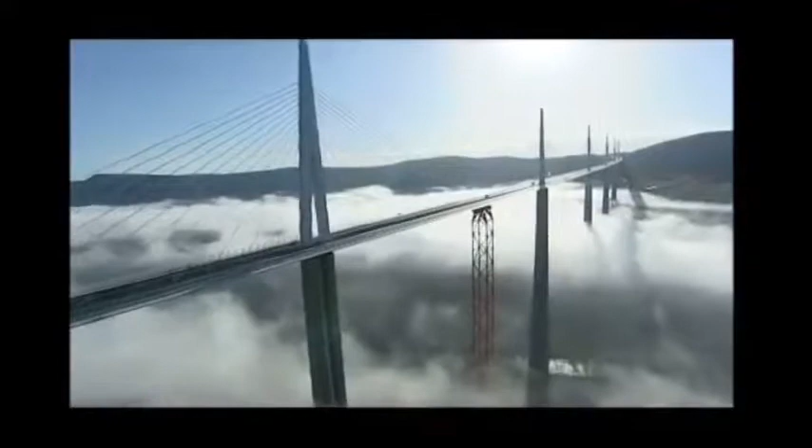Consider for a moment the Millau Viaduct, a structure 2,460 meters long, soaring 268 meters above the valley of the River Tarn. These are just figures, but stop to think how much calculation goes into such a feat of engineering. In fact, it took the Greisch engineering office 80,000 hours, 2,000 drawings, 15 engineers and 20 draftsmen to design the Millau Viaduct. And as incredible as it now may seem, the Millau Viaduct has not always been there.

Not long ago, the road between the Causse Rouge and the Causse du Larzac was constantly clogged with mile after mile of traffic jams. Of course, now and again, tentative ideas would arise, but was it really possible to put a multiple cable-stayed viaduct across the valley?

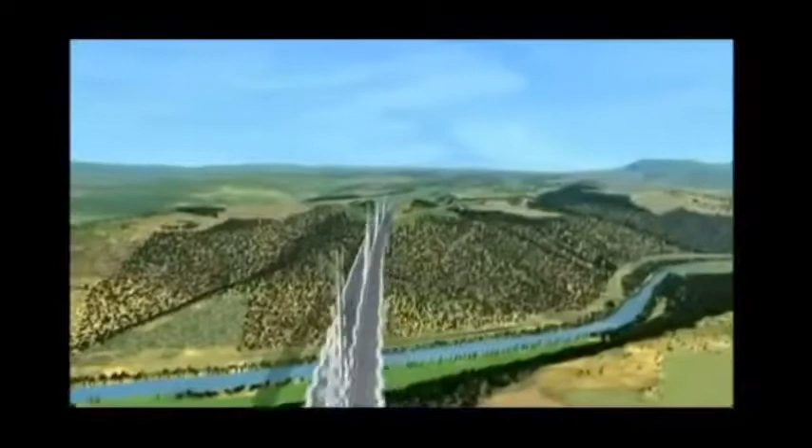Initially, the idea of using steel had attracted the minds of the engineers, but most thought that a viaduct made entirely of concrete was the solution. But then the agency that promotes the use of steel in industry asked Greisch to optimize the metal option and to come up with a competing design.

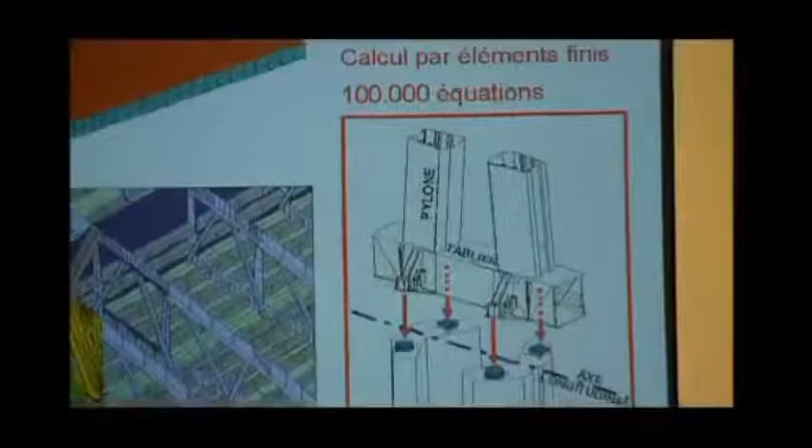At the start of the year 2000, Greisch put forward the draft design for a viaduct using steel in preference to concrete, with the positioning of the deck by the launching technique. This was a pioneering and really daring idea which would involve building some of the biggest temporary piers in the world. As the engineers opted for the push deck system, it also meant they would have to build the longest push deck system in the world.

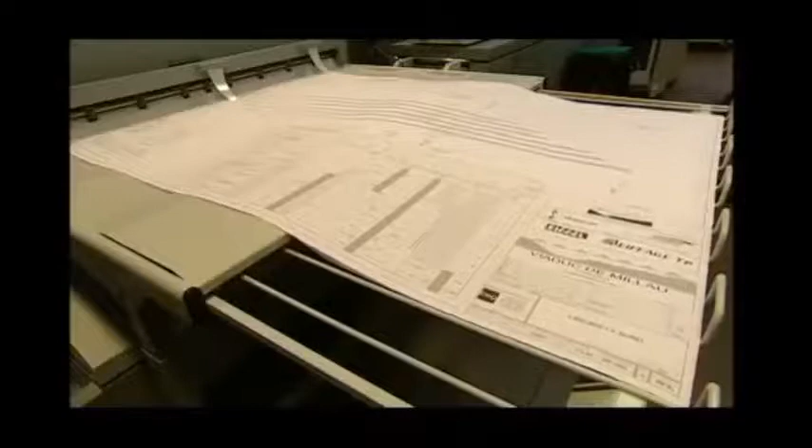Only Eiffel Construction Métallique had the confidence to take up the challenge, and they pulled it off. The Eiffage Group was given only 6 extra months of design work to complete their proposal for the competition. Talk about tight deadlines. Greisch took advantage of this time to optimize the technical choices, the construction methods and the completion deadlines. It was based on this revised project that the contract was awarded.

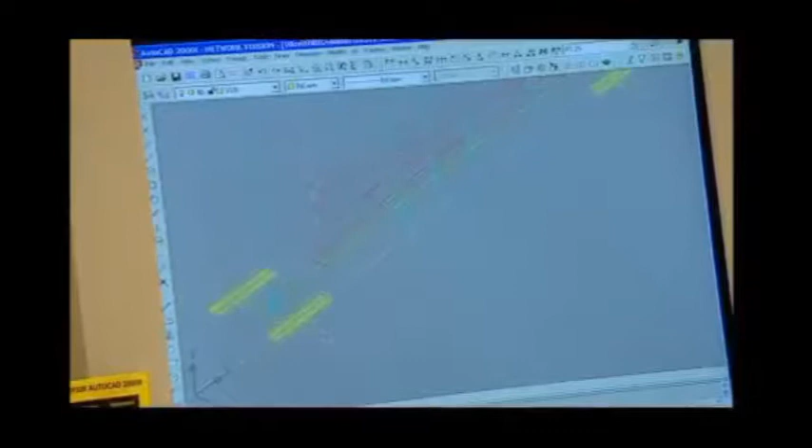In the first half of 2001, even before the contract was signed, the Eiffage Group asked Greisch to begin the implementation studies. The first task was to make all the calculations for the viaduct in operation: foundations, piers, columns, decks, pylons and stays. Greisch set about the necessary optimization and redimensioning work.

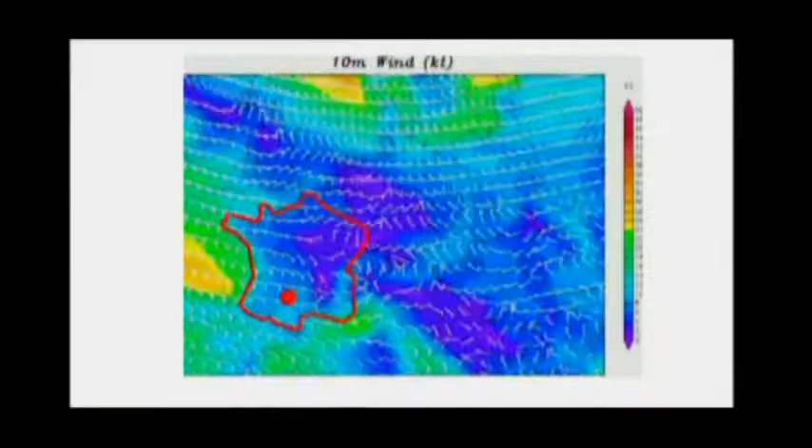In particular, it carried out preliminary wind tunnel tests to analyze the effects of wind on this huge structure. To make the necessary calculations for a potential wind speed of 225 kilometers per hour, Greisch had to write a series of new software applications.

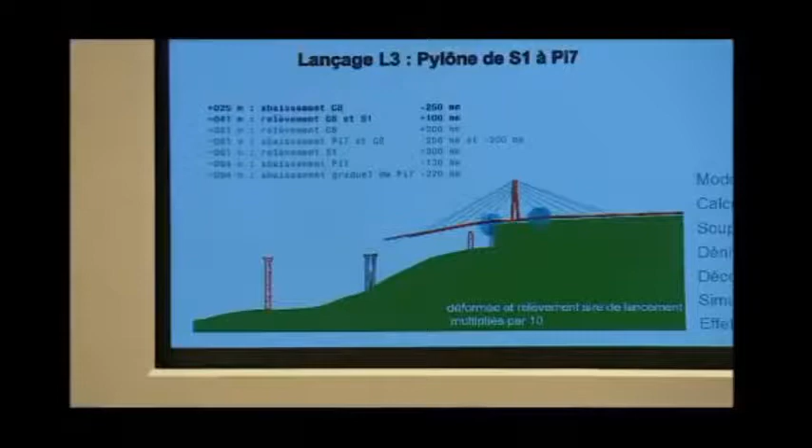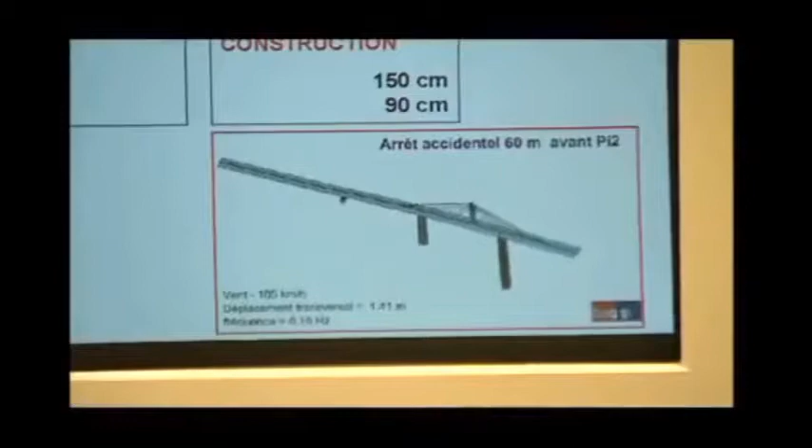For Greisch, the most important engineering work lay ahead, especially the launch studies. Would it be possible to move on a 3% slope a 2-part deck, one part being 1,750 meters long? To answer the question, Greisch had to calculate each push cycle and assembly configuration and analyze every imaginable accidental stop configuration, as well as design and develop the necessary mechanism and tools to assemble and push the deck.

Greisch set to work. With the University of Liège, it developed the special calculation rules required for this type of deck. The resulting design not only complied with the French and European standards in force, but it exceeded them. Greisch developed a series of pioneering processes.

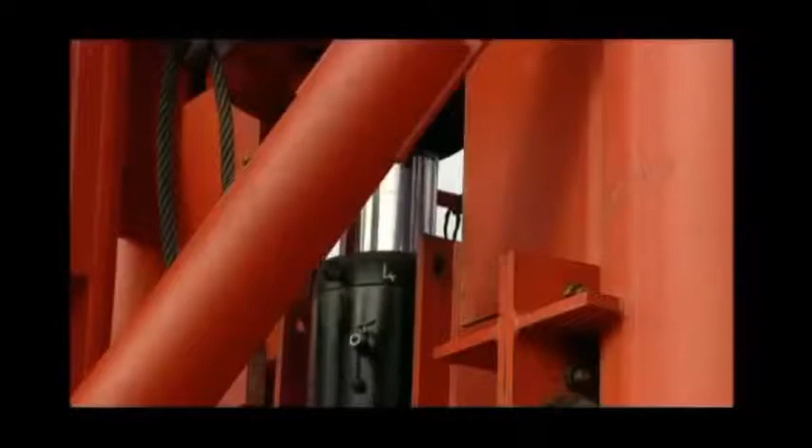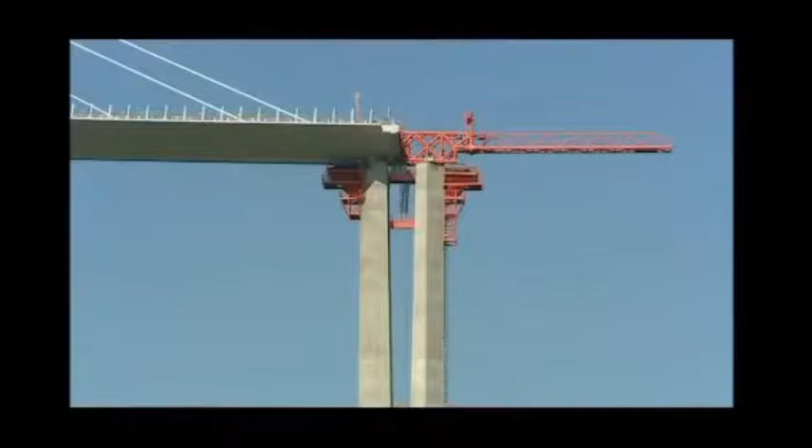Temporary piers. This effectively reduced to 171 meters the distance to be covered by each launch. Joists. This idea made it possible to duplicate longitudinally the launch supports for each pier, allowing the engineers to launch a caisson 4 meters 20 high over a distance of 171 meters.

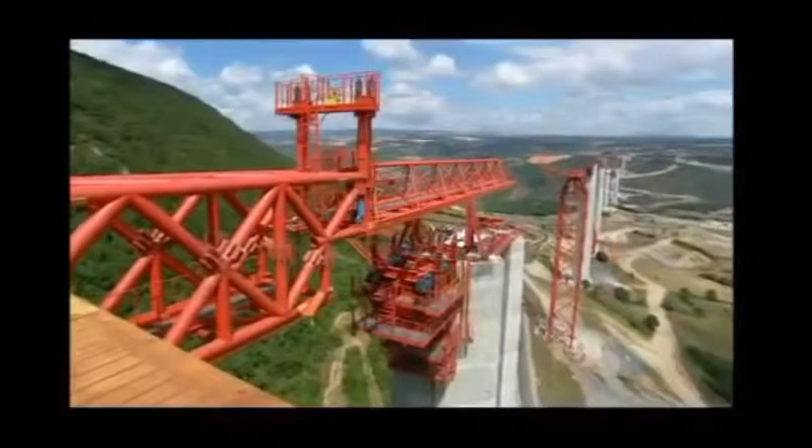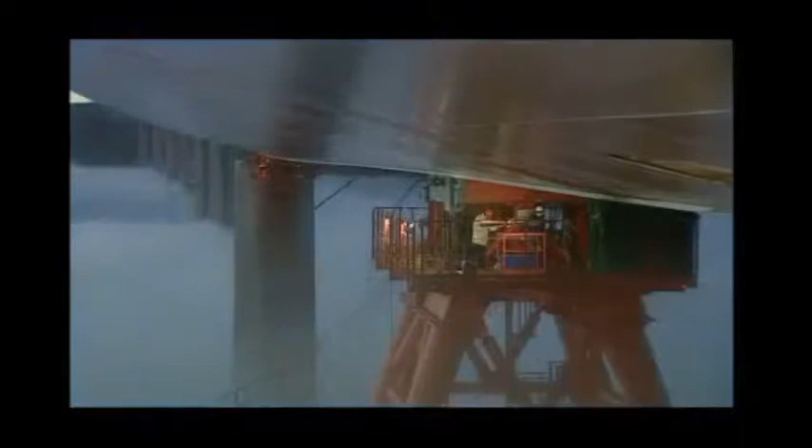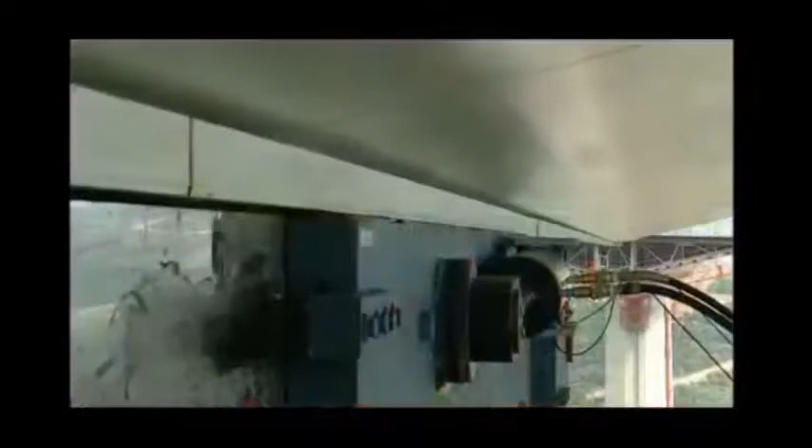Balancing devices. These were designed to prevent the 2 supports for the piers and the temporary piers from undergoing asymmetrical loads as the sections of deck advanced. Finally, the load displacement systems, the translators. These allow the piers and the temporary piers to withstand the tremendous friction generated by the movement of the deck.

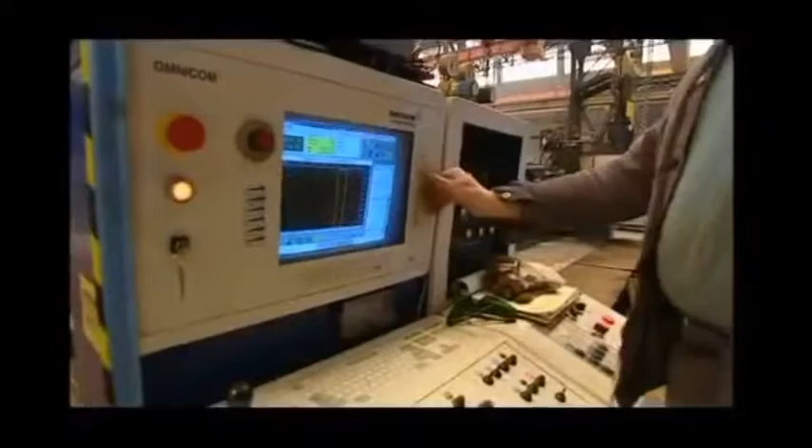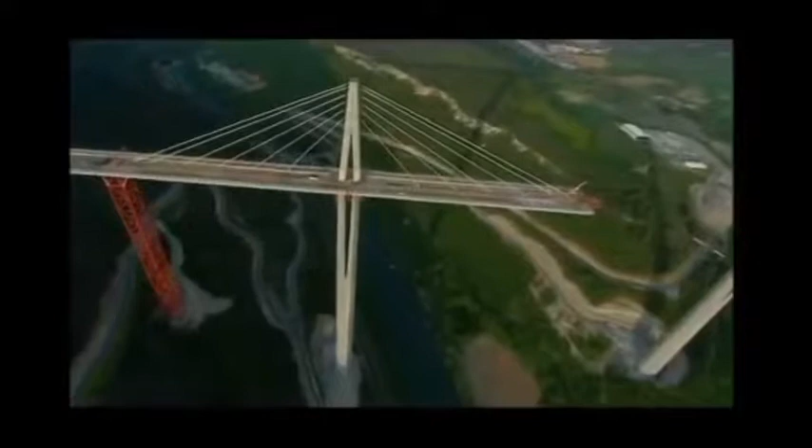In short, there was not one construction problem for which Greisch did not come up with a viable solution. Greisch had been given the task of making all the engineering drawings for the metallic elements of the viaduct and for the elements required for its construction, but in addition it provided much needed assistance on the construction site.

In preparation for each launch, Greisch analysed the meteorological data 1 week before the start of the operation. During this time, 4 Greisch engineers were on site to assist the construction site managers to analyse and control the behaviour of the viaduct and to take immediate action if required. At the same time, a team of engineers was on standby in Liège to make any necessary critical calculations.

The viaduct took shape as the construction work went ahead, 171 metres at a time, as huge sections of deck were launched until the last section was in place and the final gap was closed, confirming no fewer than 18 times the calculations and designs conceived by Greisch, until the 28th of May 2004, when the viaduct itself unleashed the champagne.

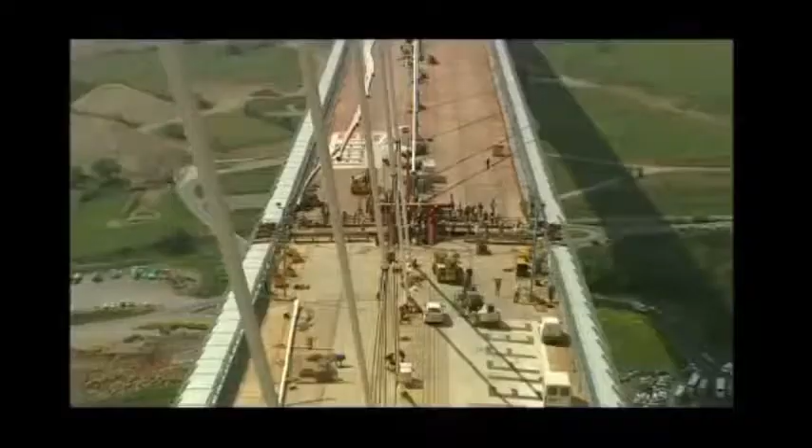To guarantee that every section of deck was perfectly in place, Greisch's team of devoted men and women were on hand at every major stage in the construction of the viaduct.

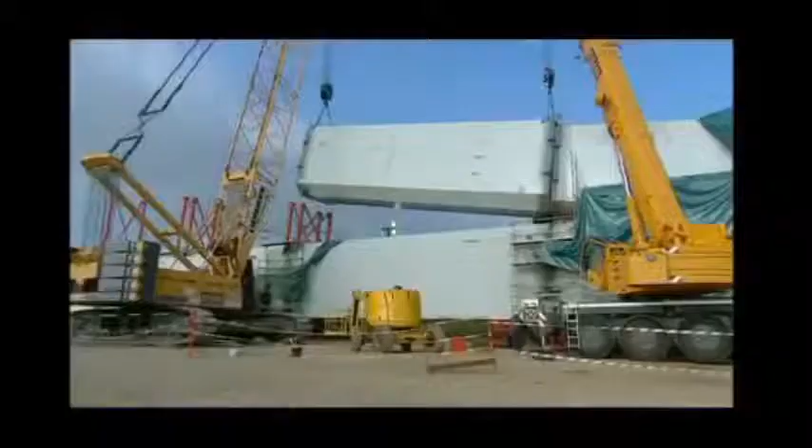It was, of course, a race against time from the very first day, but when it came to transporting the pylons, the rush was on in earnest. It took no fewer than 4 60-wheeler juggernauts to transport these 850-ton pylons to the erection site.

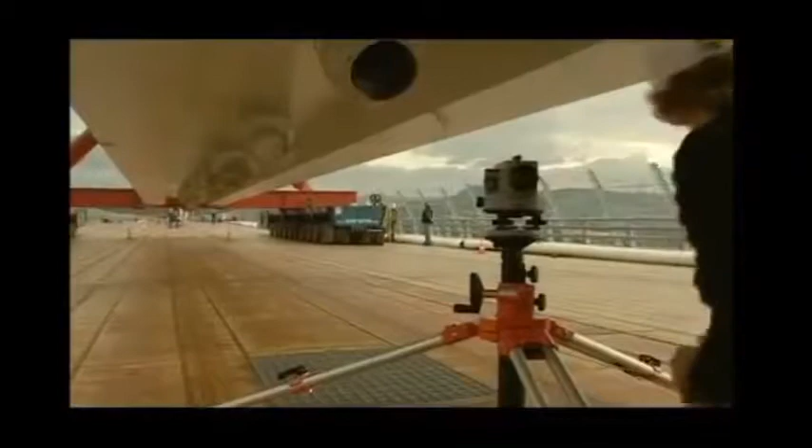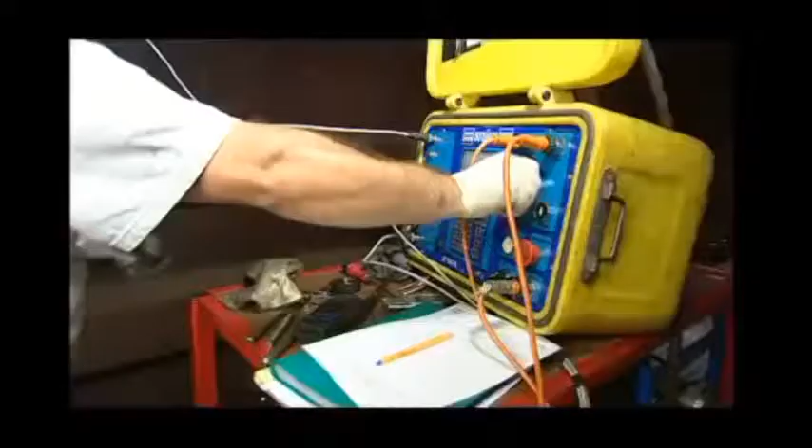Furthermore, this called for systematic verification of each section of the deck and the reinforcement of the deck where it crossed the temporary piers. The laying of the deck on its definitive supports called for the development of a very special process. The positioning of the stays was carried out according to a process that Greisch had already used for many cable-stayed bridges. Thanks to constant interaction with the construction site, the geometry went perfectly according to theory.

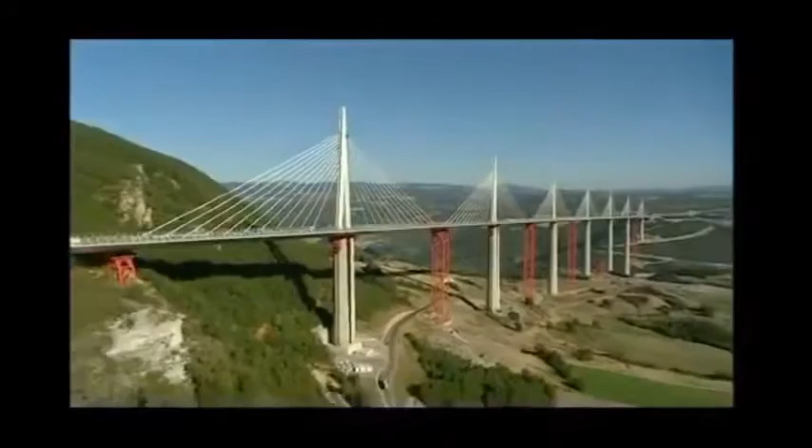There was one more crucial detail, the coating, which was applied in one single 2,460-metre pass. But would the deck withstand the thermal shock? This was followed by checks and more checks. No problem. Then a final test for the road.

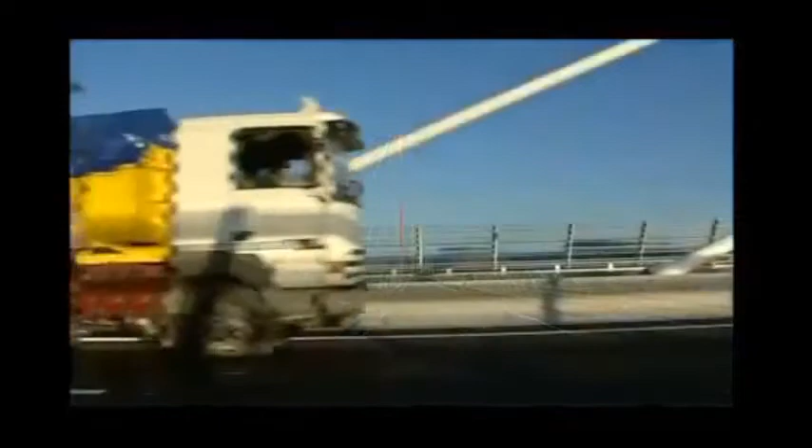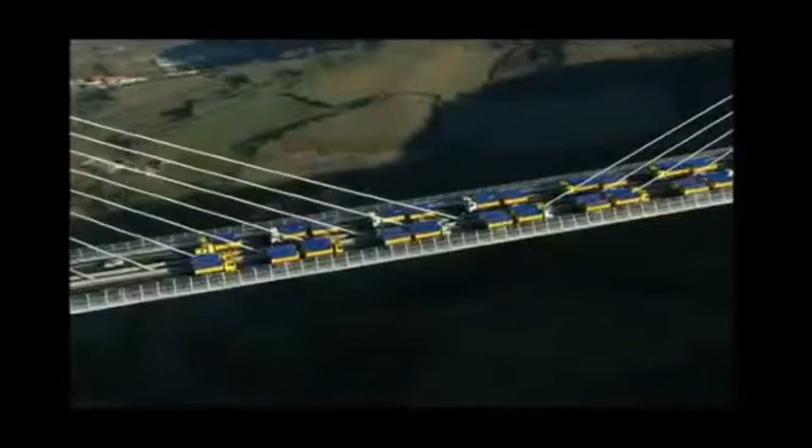The viaduct was crossed by no fewer than 30 heavy trucks with a total mass of 900 tons. Result: the viaduct didn't bat an eyelid, even with a 60-centimetre deflection. Of course, this was no surprise, since Greisch had designed the viaduct to carry twice as much weight. Since the 14th of December 2004, every passing day has brought proof that the viaduct is behaving as intended.